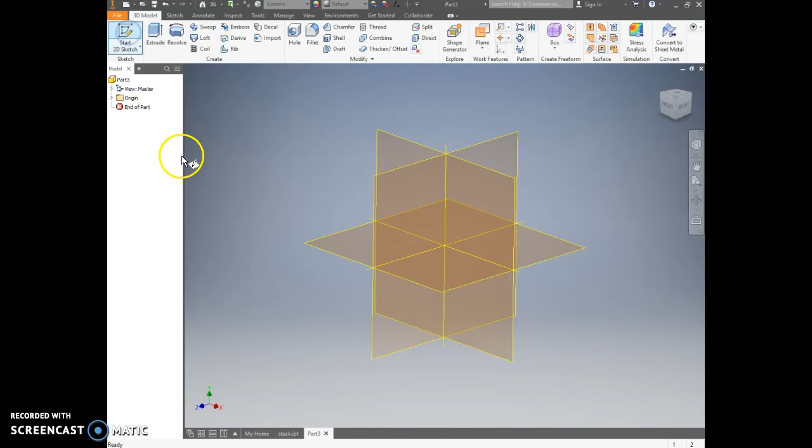So I've opened a part. I'm going to start a sketch on a plane and do a line across. I'd really like it to be equal on both sides, so we'll deal with that in a sec. It's 1.8, I'm going to go ahead and hit enter.

Then I'm going to come straight up 0.25. I'm going to hit escape and do another line on the other side that is also 0.25. Oh, whoops, I just hit enter instead of clicking 0.25. Alright, so now I've got those lines.

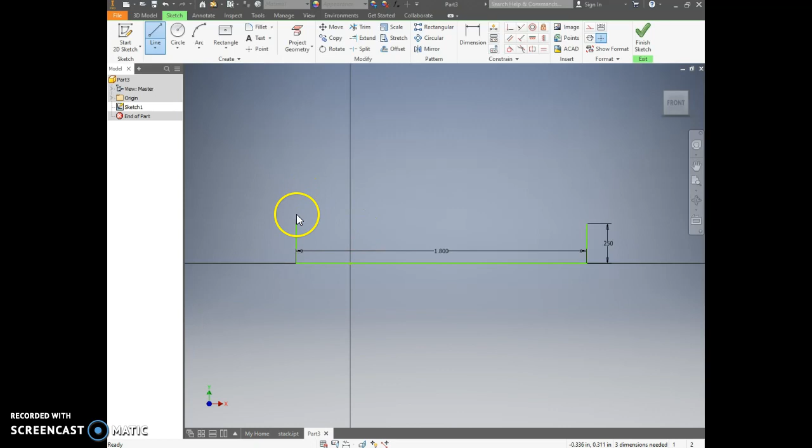I'd really like this to be centrally located, so I'm going to dimension and say I'd really like from the center point to there to be 0.9, which is 1.8 divided by 2. That way it just centers that up for me.

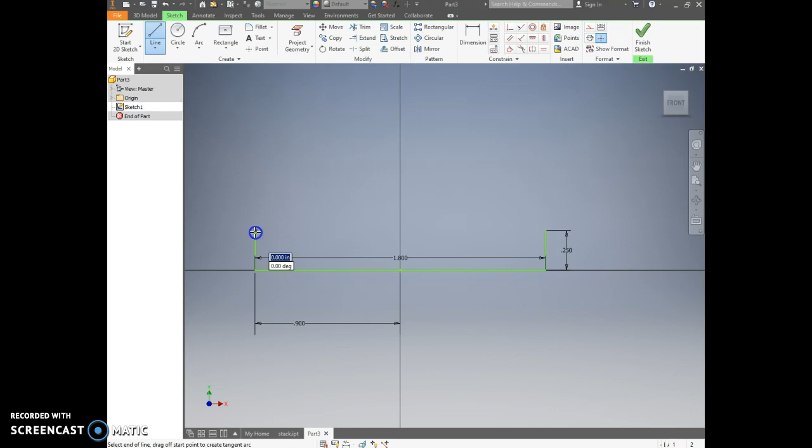Next thing I know is that I need these sides to be slanted in. I know that the overall height is going to be 1 inch. So I'm going to come back to Inventor and do a line from here up to here and then down to there. Now I know that those are equal, and coming from here to here that needs to be 1. I'm going to hit enter.

Okay, so I have my bottom pentagon. I'm going to go ahead and finish that one because it's done. What I'm going to be using is a loft to get to the smaller pentagon that's going to be up top, and its bottom is 1.2, and again it has 0.25 on both sides.

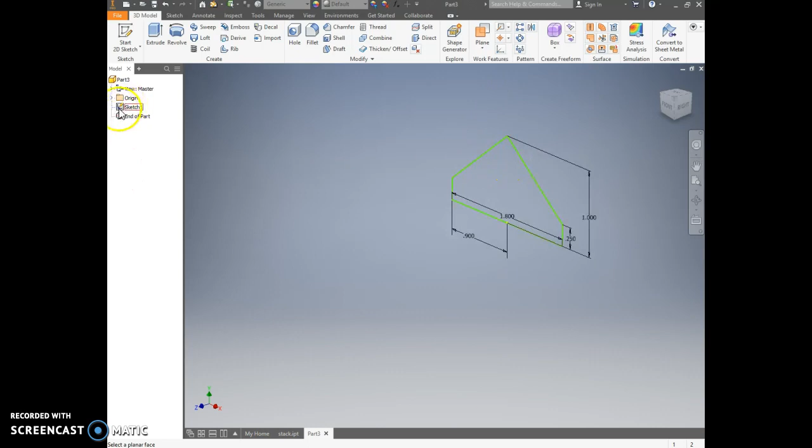So to do a loft, I need to do another plane up above it, 0.75 above the one I just used. So I'm going to do plane, offset from a plane. My original plane that we used was this XY plane, so I'm going to click it. Now since I had done the offset plane, it's telling me how far I want to offset it. I want to offset it 0.75 and hit OK.

So now I can draw my other sketch, starting a new sketch on that plane for my smaller pentagon. I centered it up because I'd want the other one to be obviously centered directly above this. The bottom line for the next one is 1.2, so I'm going to come here and do 1.2. Go ahead and hit enter.

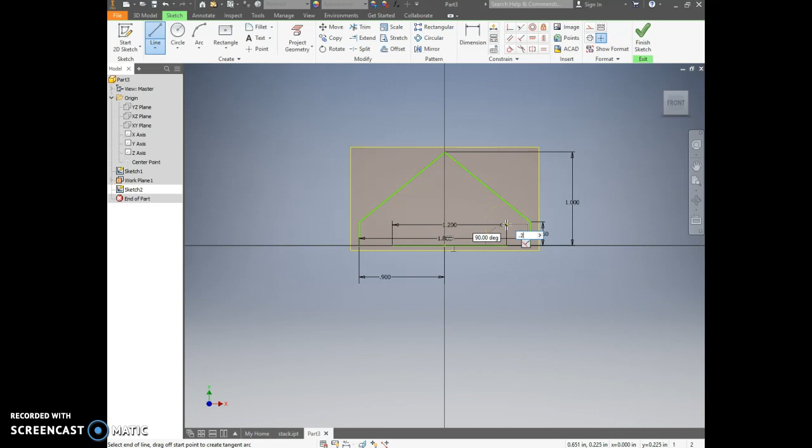We know that both the sides come up 0.25. Hit escape, do the same thing on the other side. Go ahead and click. Now I'm going to dimension - I'd like from my center to the edge this time to be 1.2 divided by 2, or 0.6. That way it centers it up.

I'm going to go ahead and do lines again from those directly up, directly back down, and then this one needs to be - or does it tell me how wide this part is? Oh, it looks like it's right here. This is the small top and it says it's 0.75.

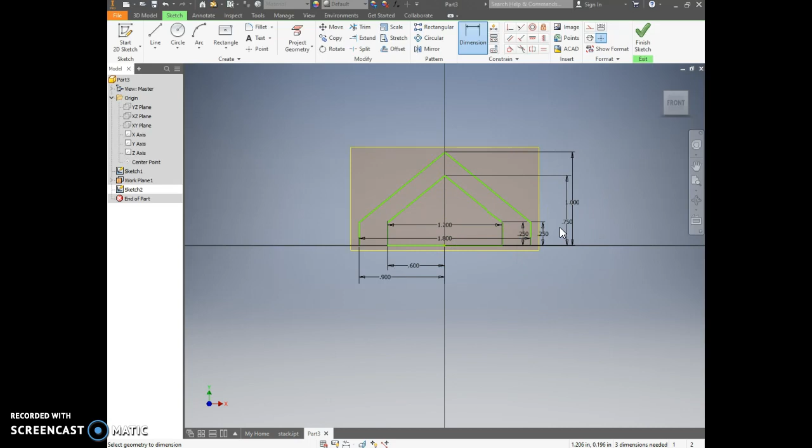So I'm going to dimension from here to the bottom, should be 0.75. I'm going to hit enter. Okay, so that makes it taller for me. I'm finished with that sketch. Now I want to do a loft in between them, from that bottom one to the top one, and I'm going to hit OK. So now I have the beginnings of my cow catcher.

Alright, next thing I'm going to do with my cow catcher is go ahead and shell it out and make it hollow. It tells me that all the walls should be 0.10 thick.

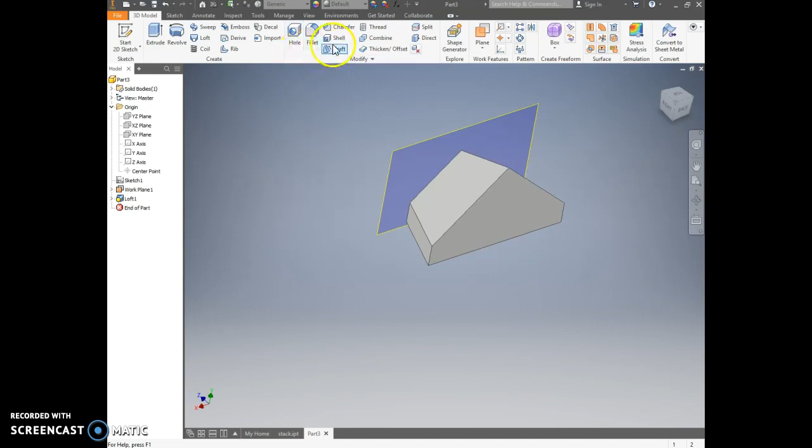So I'm going to go ahead and rotate around to the bottom that I want to make hollow, and I'm going to click shell. It already says that the thickness is going to be 0.1, so I'm just going to click right there on the bottom, and that hollows it right out for me. I'm going to go ahead and hit OK.

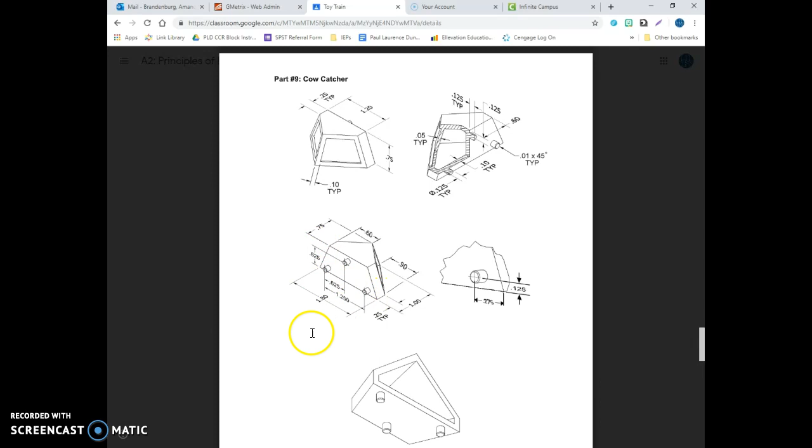Alright, next thing I see when I look at this cow catcher is these little knobs on the back. These are just little knobs that are coming out. It's got them dimensioned - we're just going to do circles and extrude them and all that good stuff. So I'm starting to kind of look and see. It tells me some stuff about them, so I bet we can probably get this figured out.

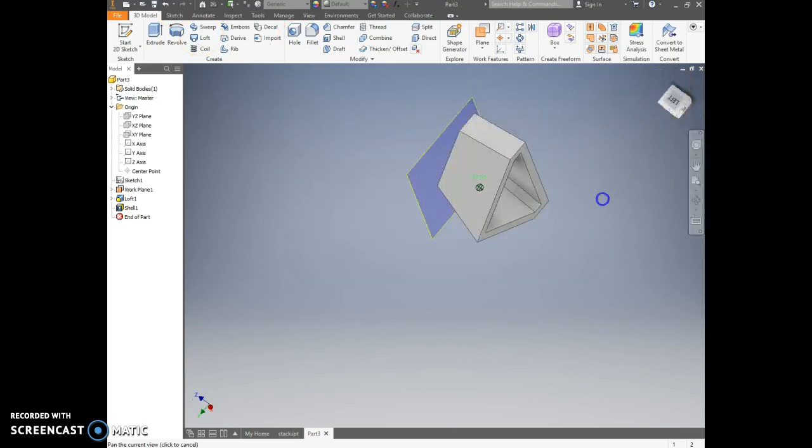So here's a little picture that tells me a little bit about it. It tells me that the diameter of each of those circles is 0.125. So I'm going to go ahead and rotate around to the back, start a sketch here, go ahead and do a little circle that is 0.125 across, then I'm going to dimension it.

And it says from the center to the bottom is 0.125, and center to the side is 0.275. So center to bottom is 0.125. Center to side is, again, I'm going to just double check, 0.275.

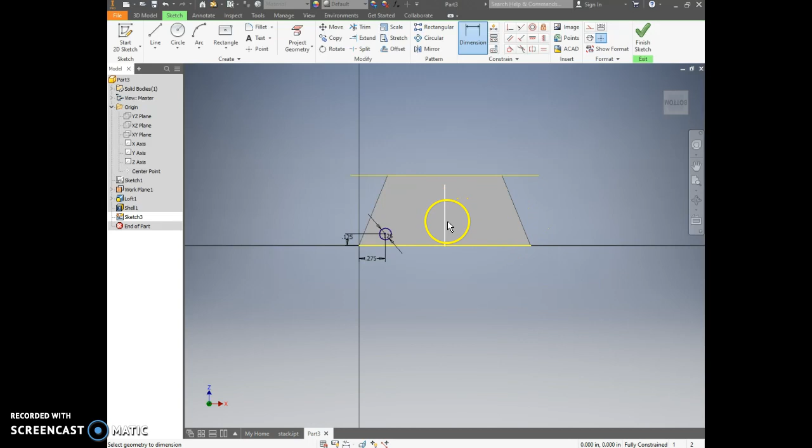I'm going to go ahead and hit enter. I'd like to do the same thing over here, and I have a feeling that I might be able to do a mirror. Let's see if I can pull that off. Can I do a mirror of this circle? Dang it, I was hoping that line in the middle was going to pop back up. Oh well, I can just do the same thing over here.

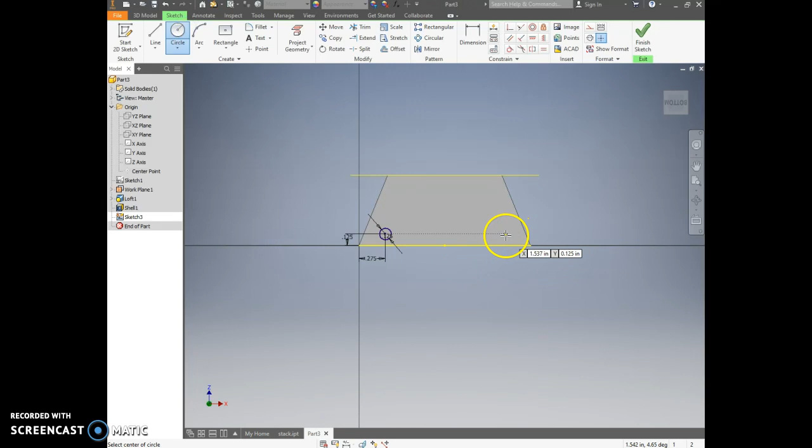I'm going to do another circle. Good news is, see how that center is already lining up for me, so I can go ahead and do that. It has a diameter of 0.125. I'm going to hit enter. I don't have to redimension the height because it was already lining up with that. I'm going to dimension it from the center of the circle to the edge, 0.275. So I'm going to click again and do 0.275. Okay, so now I got that one.

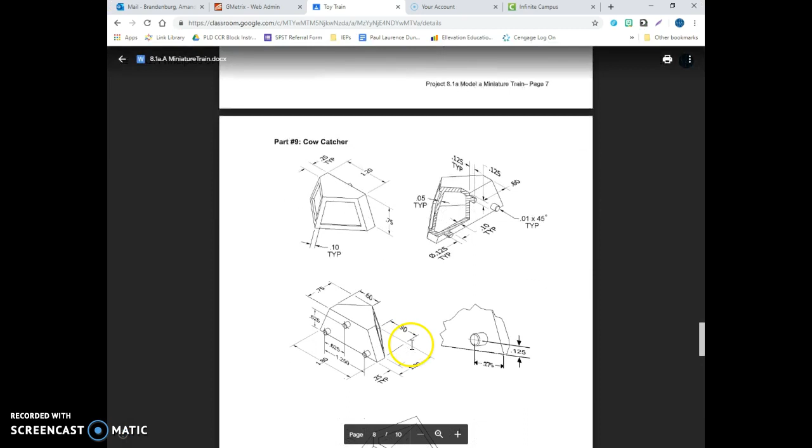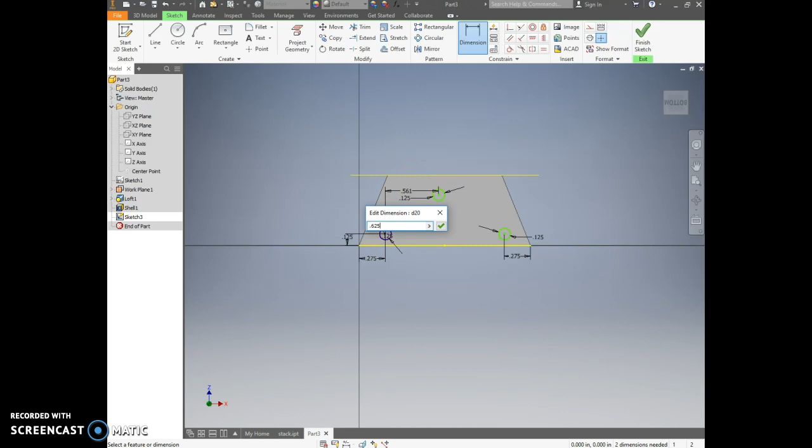One more to go. This last one, it looks like it is 0.625 from that, and then 0.625 up from the bottom. So another circle, I'm going to just place it up here. It's 0.125. Enter. And then I'm going to dimension it from here to here is 0.625. And then from the center to the bottom is also 0.625.

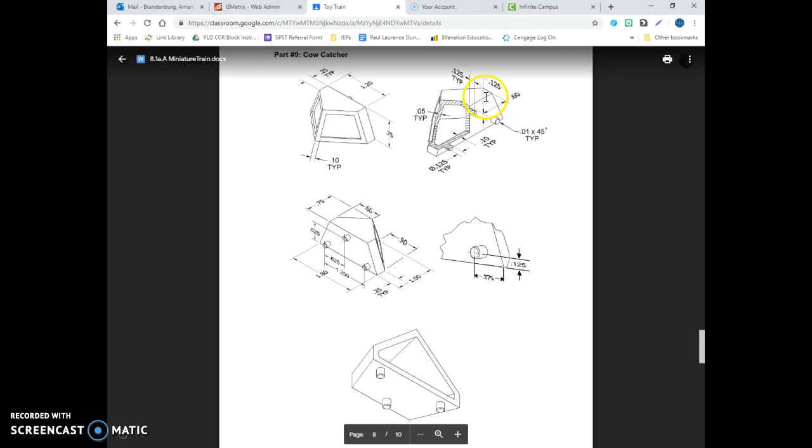Now that I have that done, we need to extrude them out, and it looks like the extrusion... let's see, that tells me about the chamfer around the edge. I think that this is telling me the extrusion is 0.125. We're going to try that.

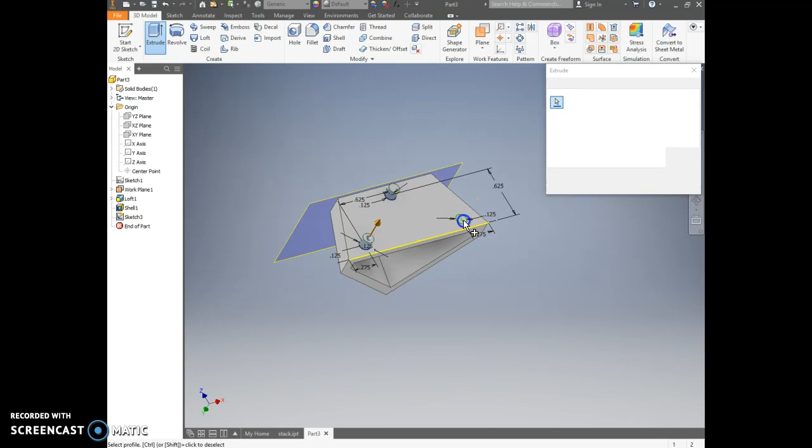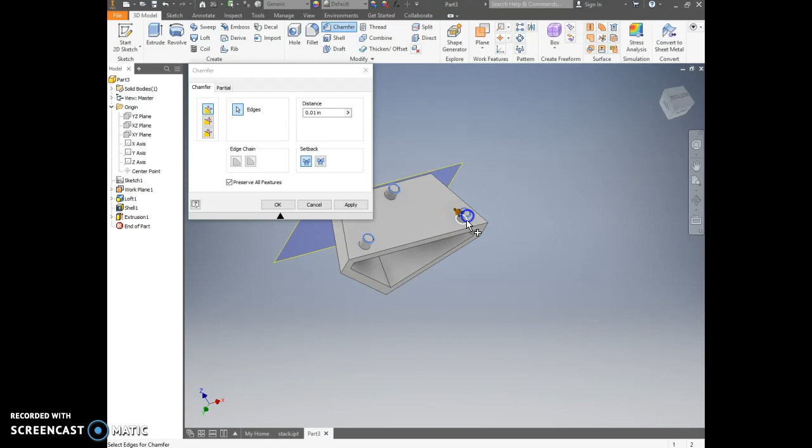So we're going to finish them all and then do an extrusion of 0.125, and then I'm just going to click on each of my circles. Okay, there are all of my circles. And then I need to do a chamfer around it, that says it's 0.01. It's going to be a chamfer, do 0.01. I should just be able to click on the edges of those. Okay, so now I've got those done.

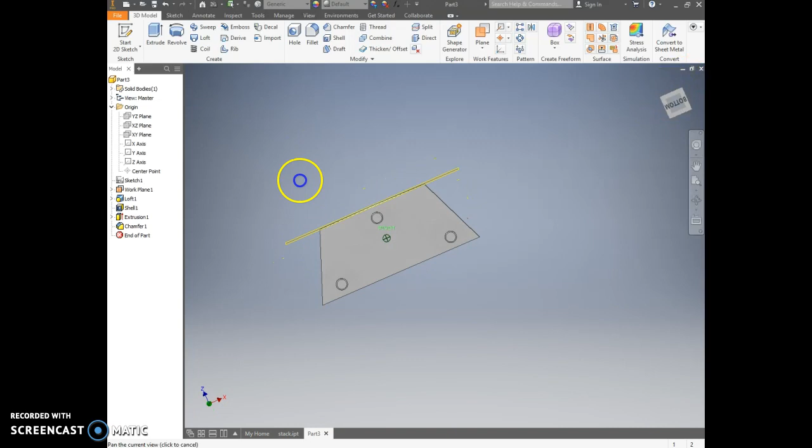So we're getting closer. It looks like the last thing we need to do are these trapezoids, I guess, essentially on the front. And it tells you that essentially you're going to draw it, and you just need to dimension from each side. It's 0.10 away from each side. So I'm going to rotate around here, and hopefully it will let me draw on these front surfaces.

So I'm going to try to start a sketch. The good news is mine lets me start a sketch, so I'm going to click that plane, and it's going to let me draw on it. At least that's what it looks like. I'm going to undo it and try it again because I feel like it's being weird. Okay, I guess that works.

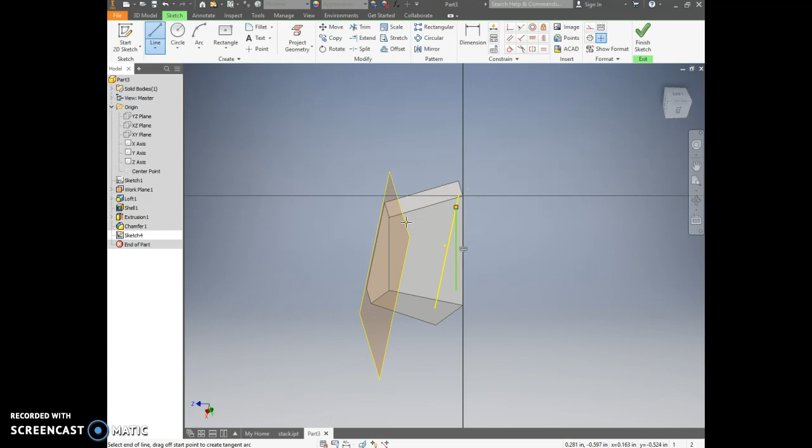So we're just going to draw out that shape on there, and then we're going to dimension all the way around. Let's see, what do we know? We know that we want this side and this side to be parallel, and it says that they already are. And then we can just dimension.

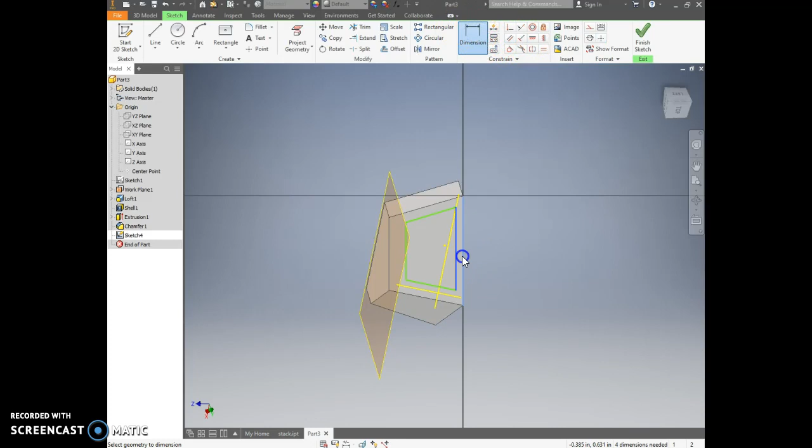We know that we need from here to here to be 0.1, and then we know that we need from here to be 0.1, and then we want these sides to be equal, so I'm going to go ahead and make them equal. It's going to balance it out a little bit. And then it also tells me the distance from there to there needs to be 0.1. Oh, whoops.

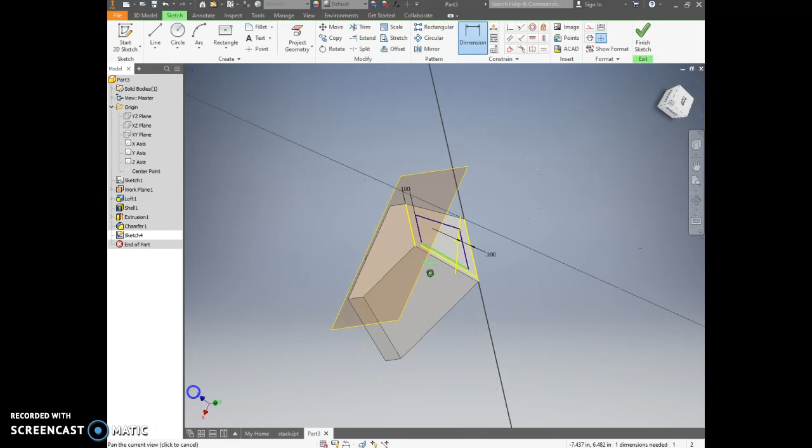Now it's saying I'm over constrained, so I'm going to undo the last constraint. Not loving the way that one's looking. Okay, I'm going to try this one again.

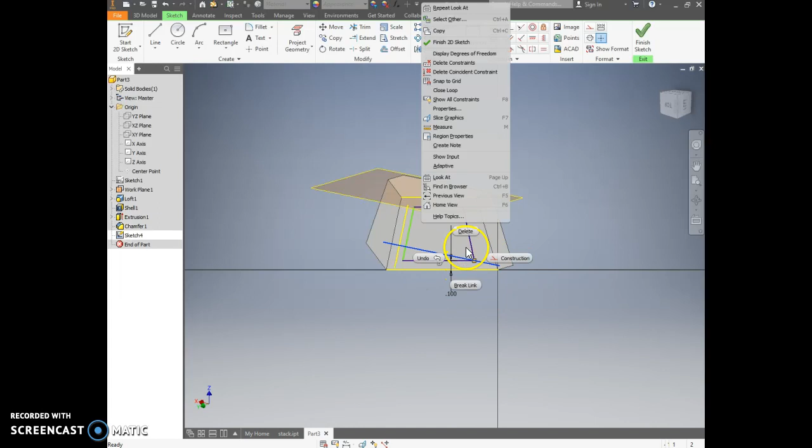So I'm just going to finish the sketch. See how it's automatically... let me see. Maybe we can get rid of some. I feel like it's constraining this to some stuff that I don't want it to be constrained to. So let's see if we can delete some of these extra lines that are happening, see if that will help.

Oh, it's trying to give me a degree measurement. Let's see. I don't see... oh okay, I guess it's from that very bottom corner. I'm being crazy, so I'm going to dimension from this very bottom corner over.

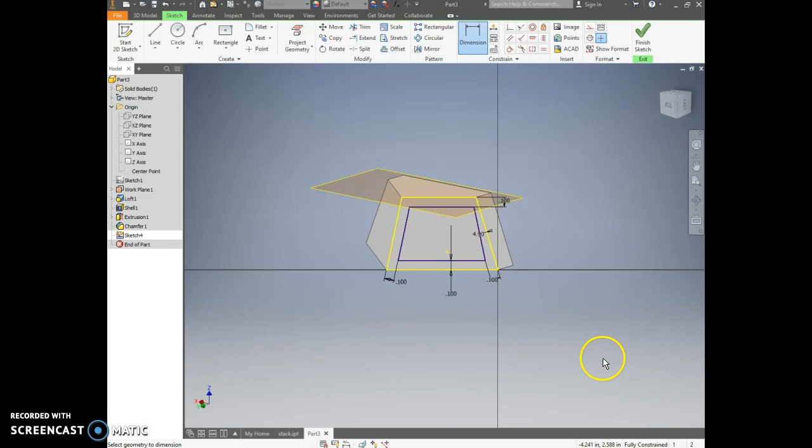Should be 0.1, there we go. Same thing from this very bottom corner over. Should be 0.1, there we go. Now it looks nice, I'm going to go ahead and do finish.

And we're going to extrude, cut that out. Here's how I know how far it's going to be cut out: it tells you that the thickness overall is 0.10 for this shell. It tells you where this is, it's 0.05. So that means you're going to be extruding at 0.05. So that extrude cut should be 0.05.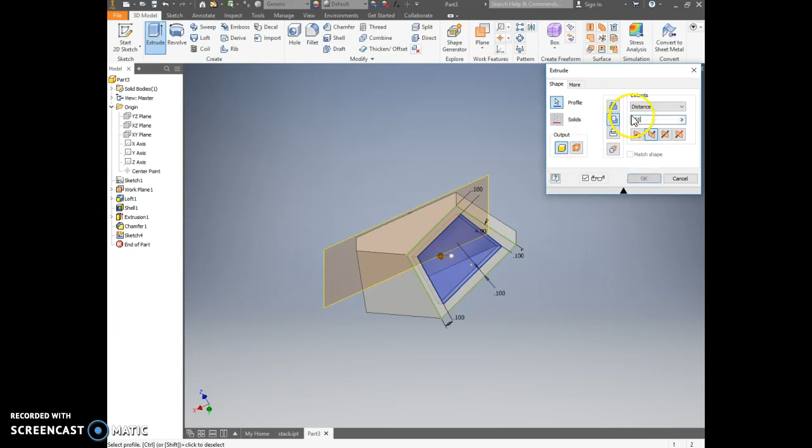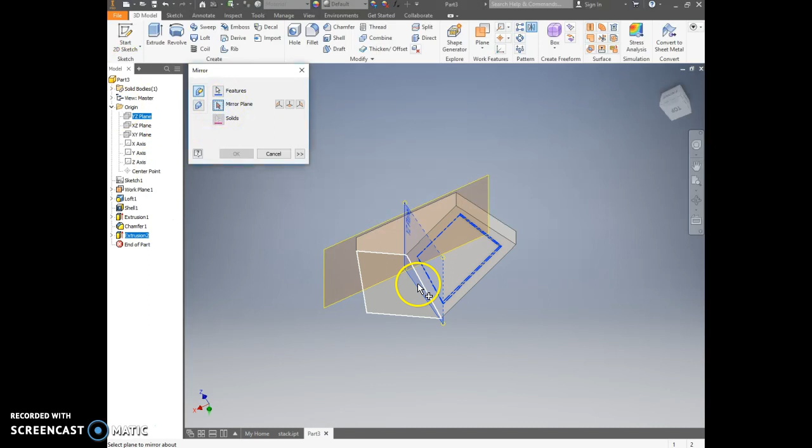Hit OK. You're going to do the exact same thing on the other side, or at this point we might be able to... I'm going to activate this YZ plane for me, and I'm going to do a mirror. So I'm going to mirror this thing I just cut out over the plane, and I want to choose this plane right there. And I'm going to hit OK, because I did not want to do all that again.

So... there is my cow catcher looking nice.